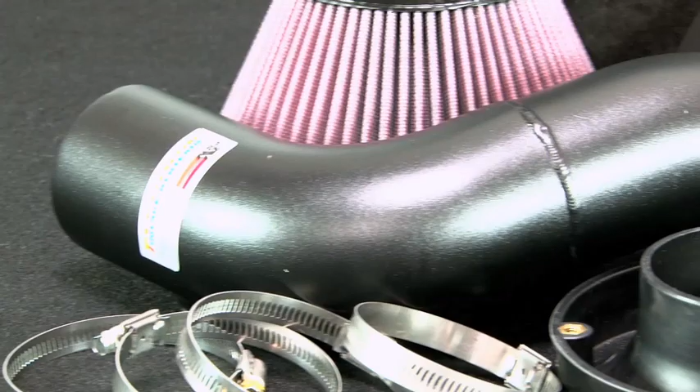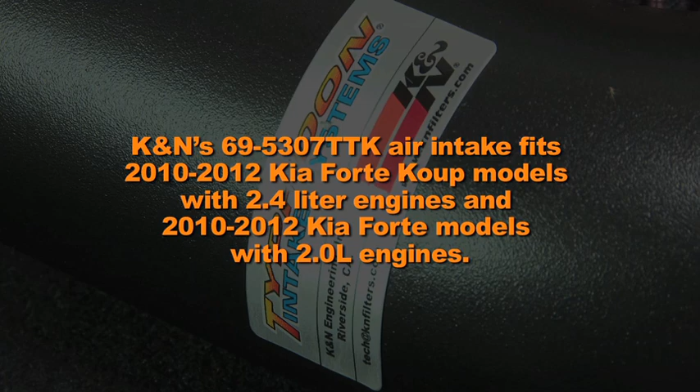This K&N air intake system is designed to increase power and acceleration by reducing restriction in the intake path. K&N's 69-5307 TTK air intake fits 2010 to 2012 Kia Forte Koup models with 2.4-liter engines and 2010 to 2012 Kia Forte models with 2-liter engines. It comes with a large reusable K&N cone-shaped air filter that takes advantage of the available space under the hood.

The 69-5307 TTK air intake is not legal for highway use in California or other states adopting California emission standards. Check knfilters.com for an up-to-date list of models that this air intake fits and for a list of other CARB

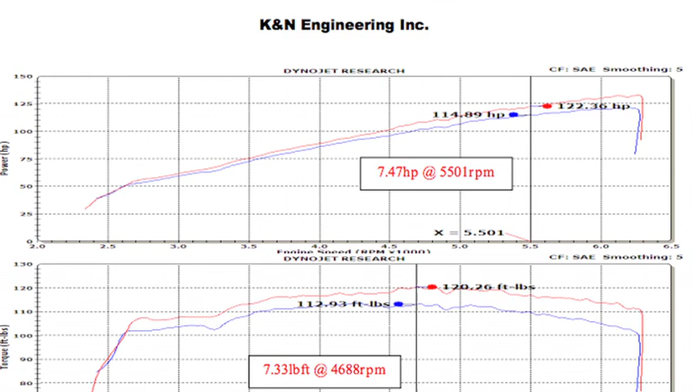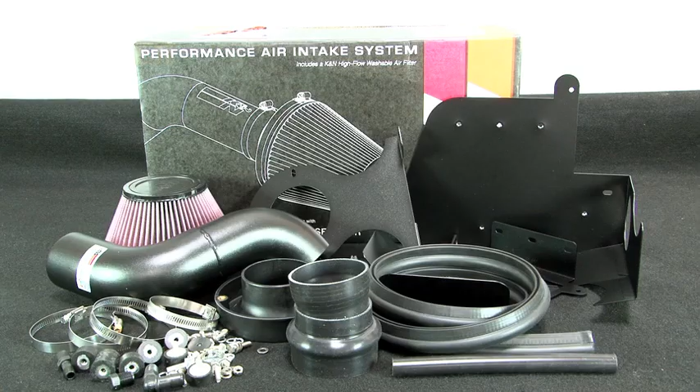adoption states. K&N power testing showed an estimated power gain of 7 horsepower at 5,501 RPM with the 69-5307 TTK air intake installed on a 2010 Kia Forte with a 2-liter engine. Actual results will vary depending on the condition of the vehicle, mileage, weather, and other variables. With the air intake installed, we ran the vehicle on the dyno to test the sound comparison versus the stock intake.

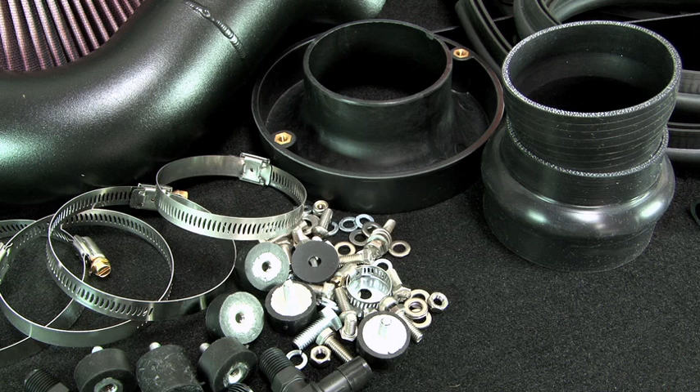The intake system includes components that have been designed or matched to the needs of these vehicles to produce a safe horsepower increase. Detailed installation instructions are included with this kit. The tools needed for this install are shown. Turn off the ignition and disconnect the negative battery cable. Lift up and remove the engine cover from the engine.

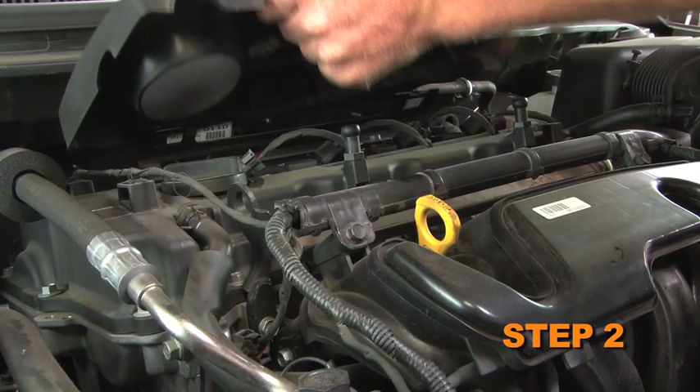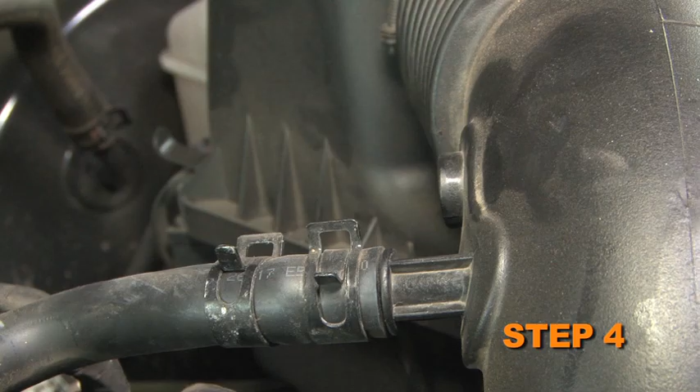Release the spring clamp, then disconnect the crankcase vent hose from the valve cover port. On vehicles equipped with an EVAP vent line, release the spring clamp, then disconnect the EVAP vent line from the factory intake tube. Loosen the hose clamp that secures the factory intake tube to the throttle body. Remove the 2 bolts securing the fresh air intake duct to the core support.

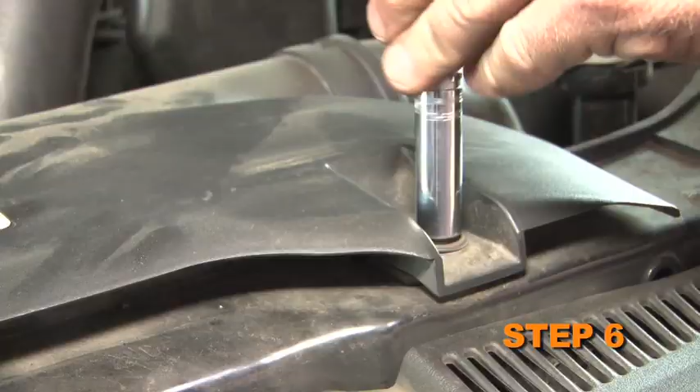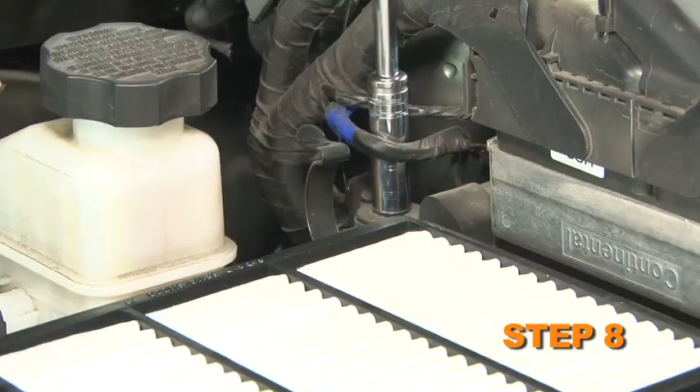Then, remove the fresh air duct from the airbox. Release the 4 upper airbox retaining clips. Then remove the upper airbox and intake tube from the vehicle. Remove the 2 bolts shown securing the lower airbox. Lift the airbox ECU assembly up and lean it towards the engine. Then remove the 4 bolts securing the ECU to the airbox.

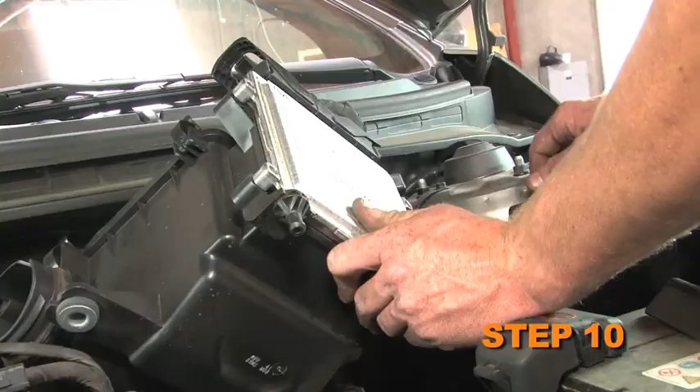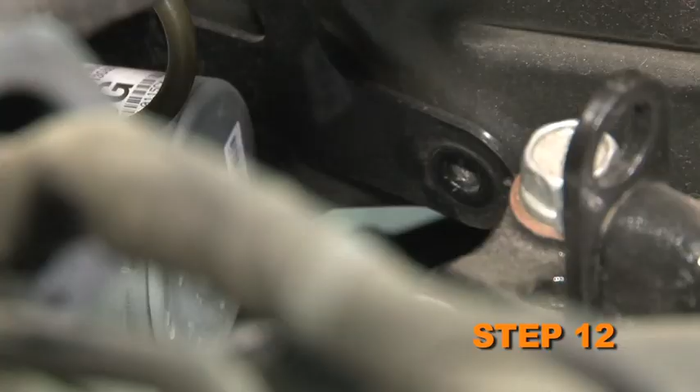Separate the ECU from the airbox and set it aside. Then remove the airbox from the vehicle. Install the 1/2-inch rubber-mounted stud onto the heat shield mounting bracket. Remove the bolts securing the ABS pump bracket to the inner fender. Install the heat shield mounting bracket assembly using the provided hardware.

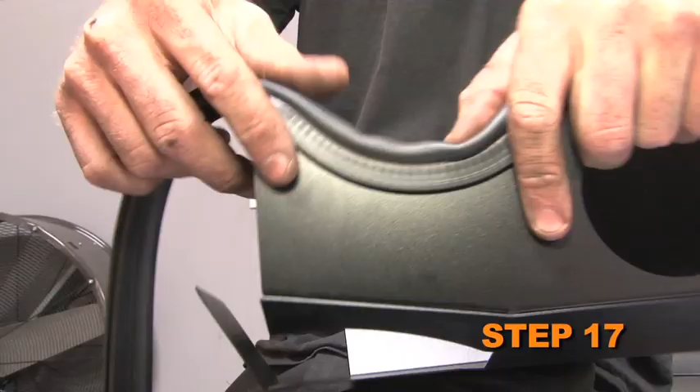Remove the specified airbox mounting grommet from the engine mount bracket. Using the provided fender washers, secure the 1/2-inch rubber-mounted stud to the airbox mounting bracket. Attach the provided 1-inch rubber-mounted stud to the battery tray. Install the provided edge trim onto the heat shield. Some trimming of the edge trim will be necessary.

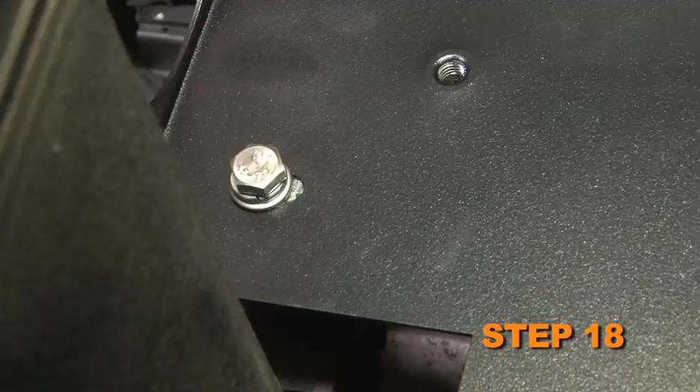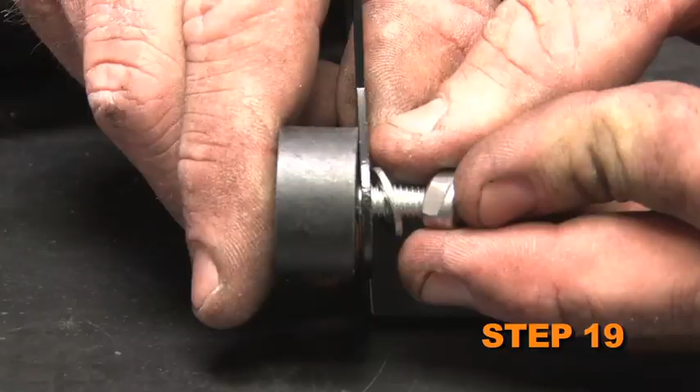Install the heat shield assembly into position and secure it to the previously installed rubber-mounted studs using the provided hardware. Install 4 rubber-mounted studs to the ECU mounting bracket and secure it with the provided hardware. Secure the ECU to the rubber-mounted studs with provided hardware. Secure the ECU assembly to the heat shield using the provided hardware.

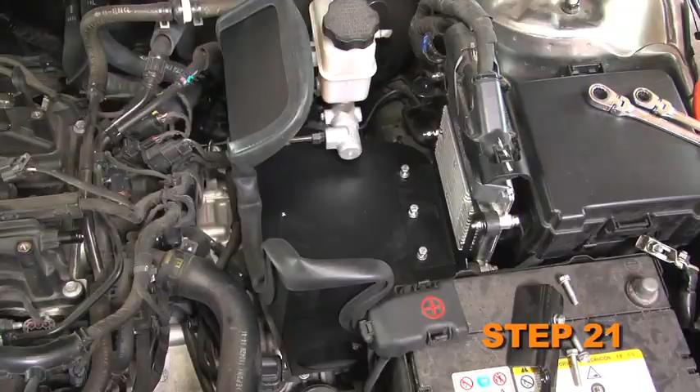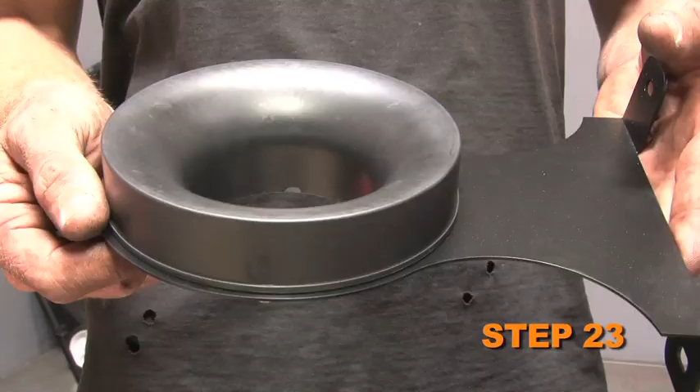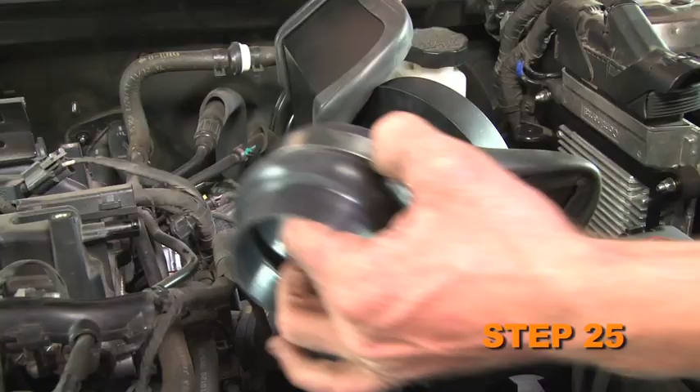Install the silicone hose onto the throttle body and secure it with the provided hose clamp. Install the filter adapter onto the mounting bracket and secure it with the provided hardware. Install the bracket and filter adapter assembly onto the heat shield and secure it with the provided hardware. Install the provided hump hose onto the filter adapter and secure it with the provided hose clamp.

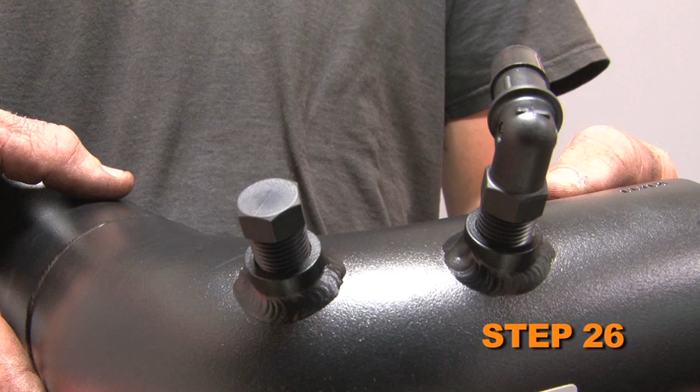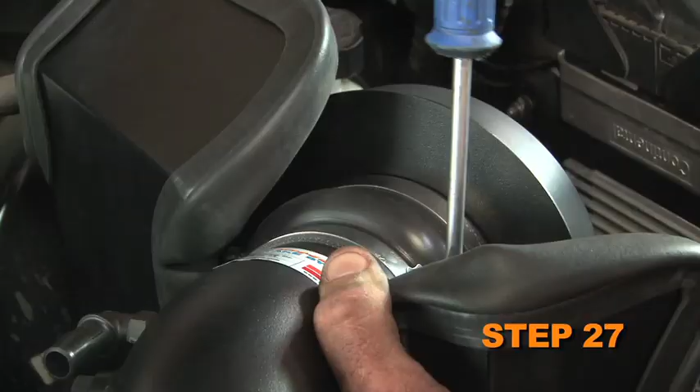Install the 2 vent fittings into the K&N intake tube. On vehicles that are not equipped with an EVAP vent line, install the provided NPT plug in place of the straight vent. Install the K&N intake tube into the silicone hose at the filter adapter, then into the hose at the throttle body. Then secure it with the provided hose clamp. Install the K&N air filter onto the filter adapter. Then secure it with the provided hose clamp.

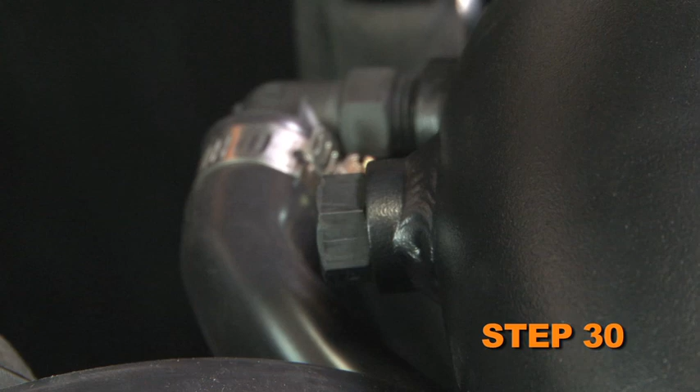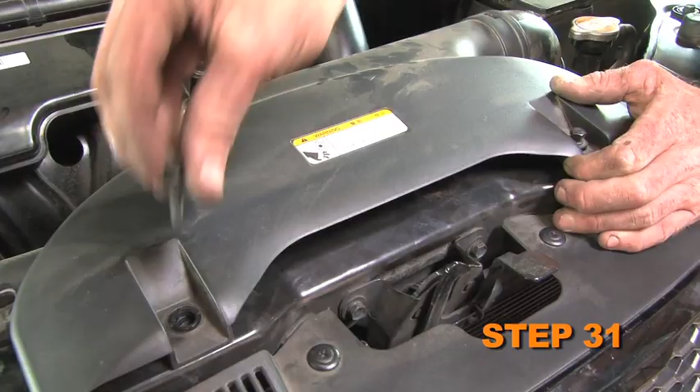Install the provided silicone hose onto the 90-degree fitting installed into the K&N intake tube. Then attach the open end to the valve cover port and secure it with the provided hose clamp. On vehicles equipped with an EVAP vent line, attach the factory vent line to the straight vent fitting installed into the K&N intake tube. Reinstall the fresh air intake scoop onto the core support and secure it with the factory mounting bolts. Insert the fresh air intake tube into the hole in the heat shield.

Reinstall the engine cover into position. Reconnect the vehicle's negative battery cable. Double check to make sure everything is tight and properly positioned before starting the vehicle. It will be necessary for all K&N high-flow intake systems to be checked periodically for realignment, clearance, and tightening of all connections. Failure to follow the above instructions or proper maintenance may void warranty.